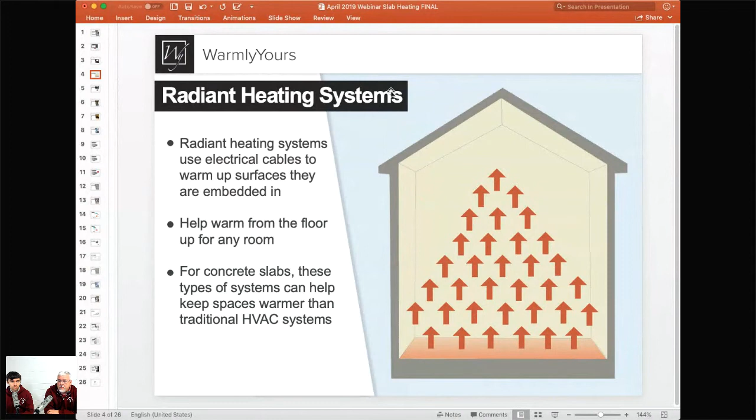And what's great is, if you have a slab, it's naturally going to feel cold. So if you had heat coming from overhead ducts, let's say you were in a basement, then all that heat would be coming from above. It gets about 2/3 of the way down in the room, and then it goes right back up to the ceiling. So your feet really never get warm in a forced air situation, whereas your feet are the first thing to get warmed up with this system. So this is a lot better, especially in basements, when it comes to HVAC systems.

So we're going to talk primarily about heating the slab, but let's say that the person already has a slab in place. What we're talking about in this particular slide is that you have a slab already and you want to heat the floor above it. Later, most of this presentation will be about pouring a brand new slab and getting heat built into that slab. So let's talk about warming a room over an existing slab.

Yeah, so in case the slab is already finished and you want to add floor heating, the biggest key element here is to add that thermal break, to add that insulation over your existing concrete slab, because you want to make sure your floor heating is nice and warm, and you don't want to try to heat that slab at this point because it's already finished and complete. So adding the insulating underlayment, like it's shown in the picture, one of our products like a synthetic cork, creates that nice thermal break and makes your floor heating installed on top work nice and efficiently, getting to the high temperatures and so on.

Yeah, so we're actually heating just a very thin section, less than 1 inch to 1.5 inches of material, which makes it heat faster. It'll probably get a little bit warmer, and it'll definitely allow you to change much quicker, as opposed to a concrete slab, which is going to have a much longer heating duration. Right. So you're kind of doing two different things. This is for a system that's going on top of a slab that already exists in the house. So we've covered the top of the slab. That's what we do most of the time here at WarmlyYours, because we talk to people who are remodeling, and there's a lot of remodeling work that's done on a slab that's already there.

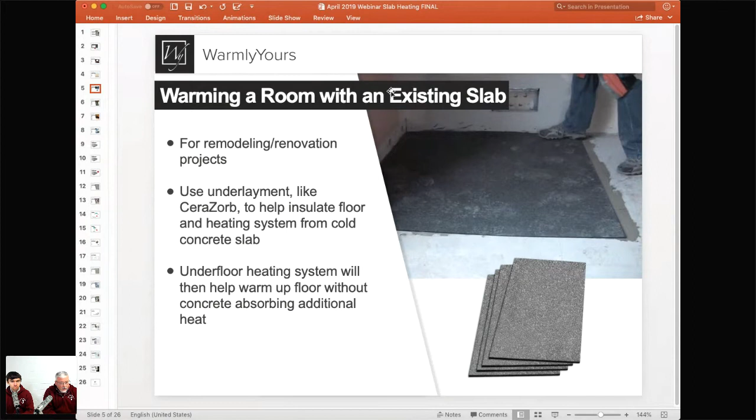So there is a difference. If that's the case, you use insulation. If you want to actually heat the slab, then there would be no insulation, because you don't want to block the heat from your feet. So this is actually the concrete slab getting charged with heat. And that's exactly what's going on here. So Gary, thank you for asking that question. So once again, expansion joints are very, very important. Let us know where they are, so we'll design the product around that.

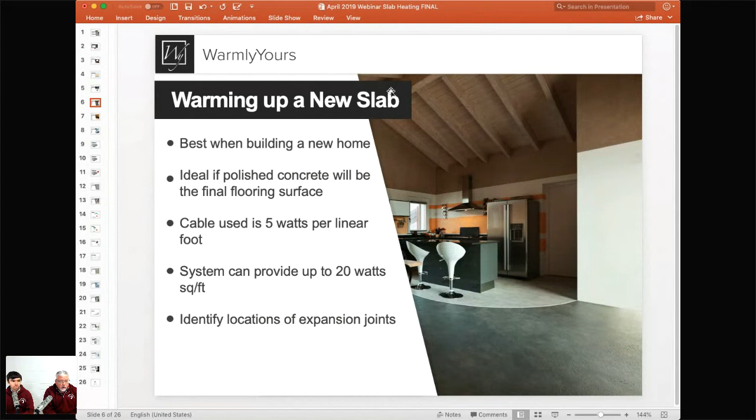So warming up a new slab with flooring. So this is actually when you're going to install carpet or tile or something on top of that. How is that different? Yeah, I like that slide. There are a lot of bullet points, a lot of information to talk about here. So yeah, there's really those two sort of subcategories here, where you just want to heat the slab, or you want to heat the slab and have the flooring on top.

If you do have a flooring on top, you really want to check with your local electrical code, or see how they adapt the national electrical code, to understand what the requirements are in terms of wattage per square foot. Typically, it's 15 watts per square foot, but that was recently changed. So once again, check with your local code, see what requirements you need to follow. We will design our system, our plan, according to those requirements. And at this point, we can see if this heating cable needs to be used here, maybe spaced 5 inches apart, or it's the slab heating mat that can be used at 20 watts per square foot.

Yeah, what the NEC is doing, the National Electric Code, different states are in different years of the National Electric Code. The 2017 National Electric Code doesn't have a limit on the number of watts that you can have in your floor. So in some states you can do 15 watts with the floor covering, or in some states that have 2017 coverage, you can put however many watts you want in there. So there is no limit there. That requirement is pretty much gone. You don't really need to worry about that anymore.

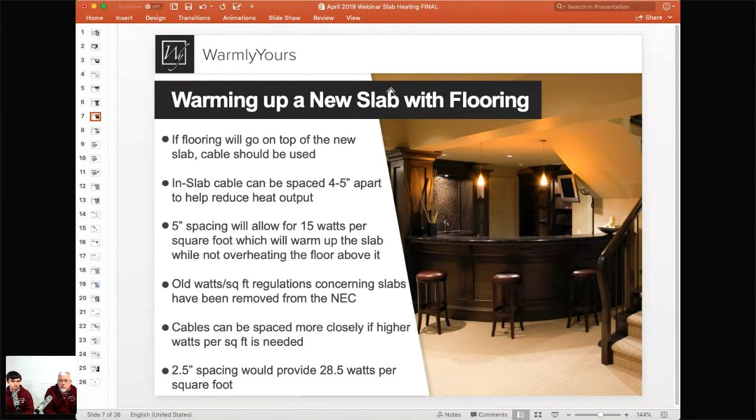So here we have slab heating systems. So let's take a look at these two types. What's going on here? So we have cables and mats shown here. And generally speaking, I always like to explain that this is really the same product. It's the same type of heating element that produces the same amount of heat, but with one or the other product, you can accomplish different applications. And with a cable, for example, you are so much more flexible. You can cover different areas, different shaped areas if it's needed. You can come up with those different designs.

So depending on the project, depending on that floor plan that we'll receive, we will design to the best of our ability to make the installation as easy as possible. And again, depending on those requirements, we'll pick one or the other product that will be used.

Yeah, so it's that blue cable that's attached to the mesh. The main thing about the mesh product is it's much faster to install than cables. So that's just something to keep in mind too. If you can do 20 watts per square foot, then use mats. They're so much faster to put down than the loose cables are.

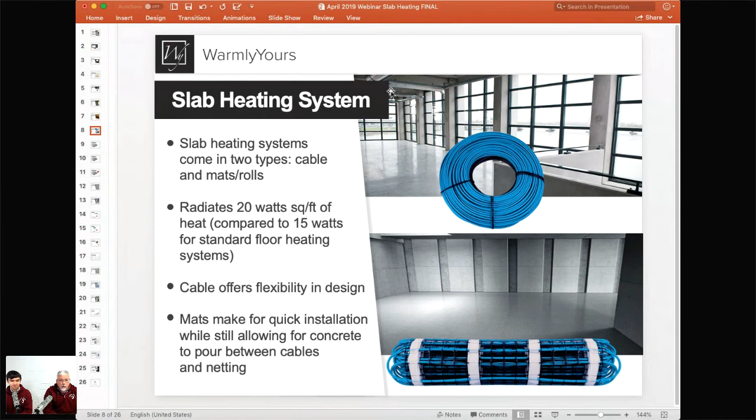So that's one thing: you don't want to be having a concrete truck there ready to pour concrete, and you're still tying these individual cables down to the rebar. That's really, really a bad scene, and those guys get really upset, and they charge you lots and lots of money for that. So we had a question from George about what is the minimum recommended concrete thickness and concrete cover.

So most building codes are going to say you have to have at least a 4-inch slab. Some say 6 inches, or whatever you want to do, but concrete's really expensive. So you don't want to pour 20 inches of concrete unless you're making an airport runway. We realize that slabs are usually 4 to 6 inches deep. What you want to do is get the cable propped up into the middle of this pour. So notice there's 2 to 3 inches over on top of this cable. It's once again the same product.

But the National Electric Code says you have to have 1.5 inches of some non-combustible product in here. It would be concrete. It has to be at least 1.5 inches over the top. So that's the most important thing. I think that's what you might have been getting at there, George. Is there a minimum above? And yes, the National Electric Code says it has to be at least 1.5 inches over the cable before you get to the top of the flooring.

So talk about the layers here and the different ways of putting this product in. Yeah, the layers are, looking at the cross section. It's always good to have that cross section when you are in that planning stage, or planning with your concrete professionals. You want to always, like Scott said, have that heating product in the middle of that pour. The last thing you want to do is have that at the very bottom and covered with 6 inches of concrete. It's going to take too much time to heat, or there may not even be much heat transferred to the top surface.

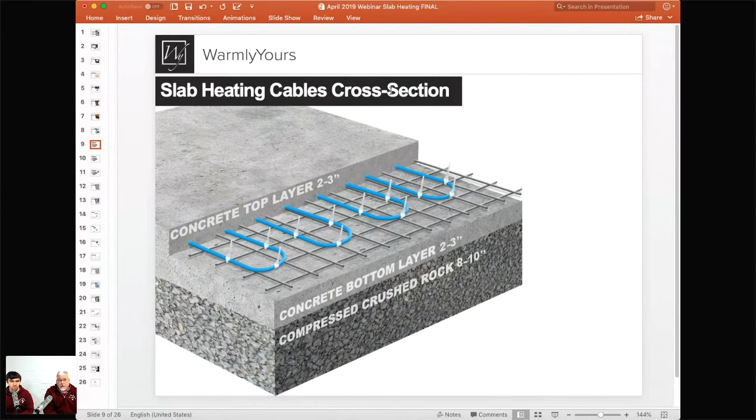So let's talk about the next slide. And what do we have here? What's the main difference between these two pictures? First of all, we have heating cables and heating mats. The positioning of that product is still at the same layer, but on that picture, you should see on the lower right-hand corner of the mat, there's a black part sticking out of the blue wire. That's your factory splice. In other words, it's the end cap factory splice, a termination of the cable. Yeah, we're gonna talk about that in the next slide.

But the difference I like to point out here, there's a lot of cable ties here holding the cable to the rebar, and there are not as many here. Because what you can actually do is use the mesh to hold it down too. So when you are doing this type of install with this mesh product, the one thing you need to tell your concrete person is they need to use sub 3/4 inch aggregate. And that means that the maximum size of the aggregate inside the concrete is 3/4 inch, because those little squares are 1.25 inch squares.

That's why they're called squares. So the thing is, if you have 1.25 inch, all that aggregate will pass through the mesh and allow the concrete to fill up naturally up to its appropriate height. So you don't have to worry about the mesh clogging or whatever. But you have to tell the installer we're going to be doing that, and they need to make sure sub 3/4 inch aggregate is to be used there.

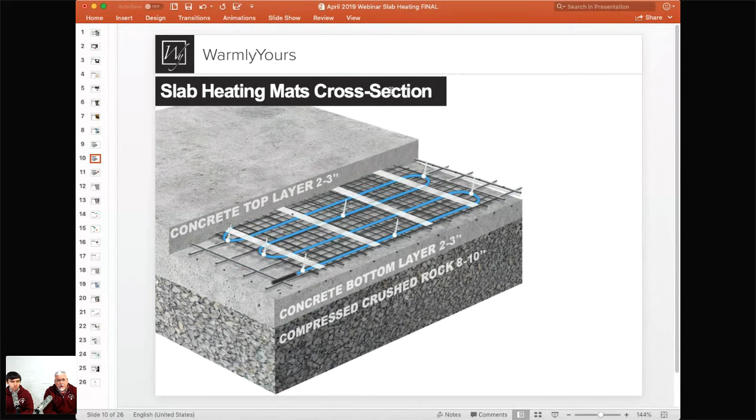So let's talk about those splices. Yeah. So the splice that is circled with a red circle here, that's that end cap. Since this is the part of the wire that you really want to give that extra layer of caution, be gentle with that part. Put the flags when the concrete installers are working with that. Set up the flags at that spot at the end factory splice.

There's the similar type connection, what we would call a start factory splice connection. Put another flag there, just so when installers are working with that, they are really careful around those areas, and of course around the whole rest of the mat and the cable. Yeah, those installers are going to be out walking over the cable. The last thing you want them to do is to walk on these splices, because that's where the actual two wires are mechanically spliced together. So you need to make sure that you don't walk on them.

We have not talked about insulation under the slab yet, because that is not a requirement everywhere, but I'm glad you brought it up. Do we have a slide about insulation? We might not. But anyway, some localities require it, and usually it's a 2-inch board of EPS or something like that. So always check with your building codes to find out if you need that and if you need perimeter insulation around the slab, because some will say you just need a 2-inch board and that's it. Some will say you need a 2-inch board plus perimeter to eliminate edge loss.

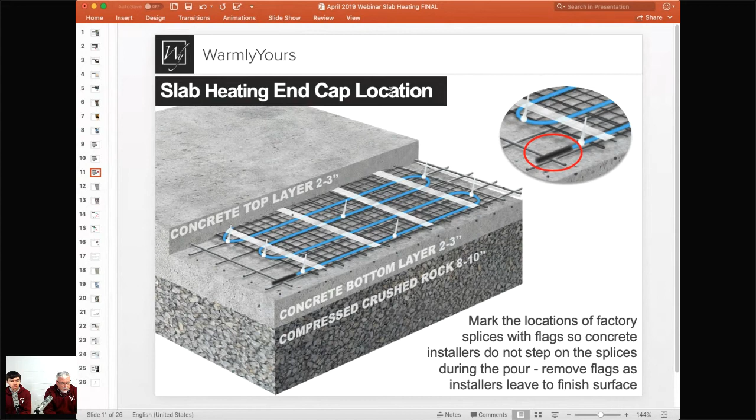And this is a great question, I'm so glad, Dave, that you asked it: you need to do whatever your local code says you need to do. So that's why it was left off of this slide, because that's purely a local install question that probably your concrete installer will be able to answer for you, right? So thank you, Dave. That's a great question.

So let's talk about the base layers. What's going on underneath here? So here we will slowly start to walk everybody through these layers that we showed all together in the cross section. For the base layer, we really just want to start with a crushed rock aggregate base that is 8 to 12 inches thick, and it's tamped down, so it's prepared for that next pour of concrete.

And this is actually the slide where we talk a little bit, just like Scott said, that 2-inch polystyrene insulation may be required by the local code, or some other types of insulation may need to be used here. Yeah, so check with your concrete installer. They can tell you what your local code requires when it comes to that insulation.

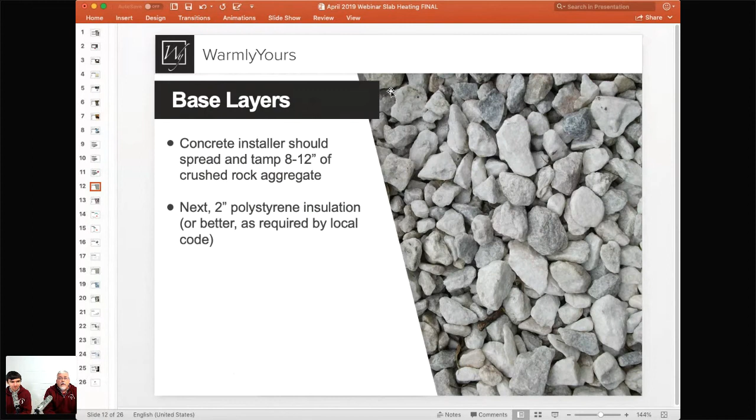And I just see Dave responded that he's in Alaska, so I have a feeling it's a good idea to have some insulation there. Well, it's probably warmer in Alaska than it is here in Chicago. So thanks, Dave. Oops, I went the wrong direction. Sorry about that.

And what you want to do is you want to find the location of where the predetermined expansion joints are going to be, because you don't run cables over or through the expansion joints. So what we would do in a job like this is we would get this set up like this. We would then do our install plan following the plan that we got, and then we'd find out where that expansion joint is, or where they are.

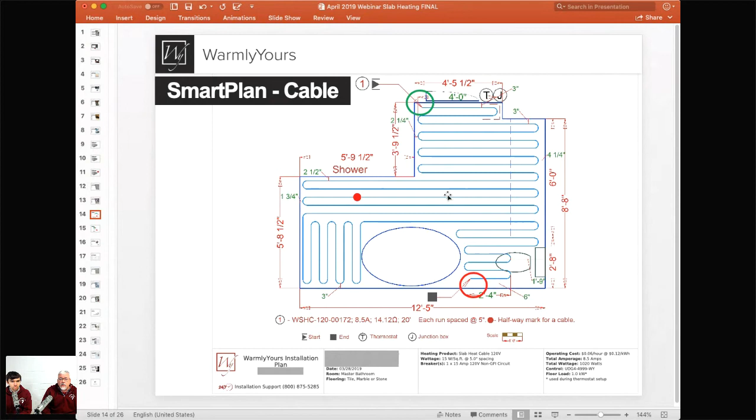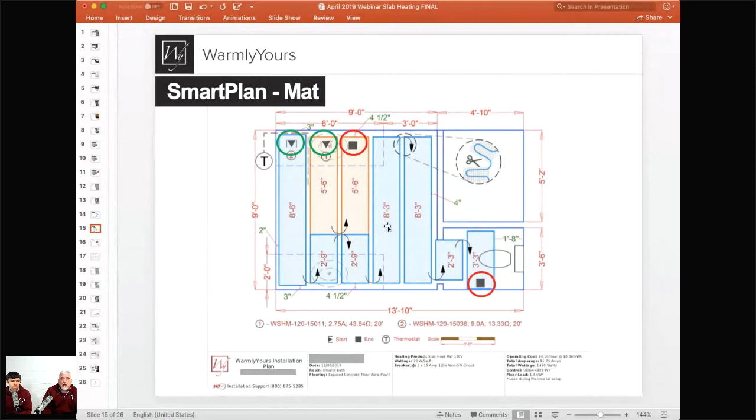Yep. So keep that in mind. That's why it's designed this way, to get these cold leads right over to the thermostat instead of having the other one start way over here and go, oops, I'm out of cable. I can't get to the thermostat. So that's kind of the difference there. And that's why they are drawn this way, to make your job easier.

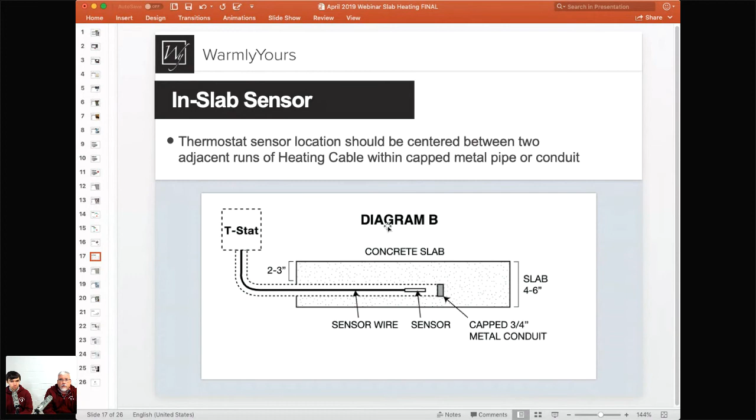So you'd be surprised how many hot water systems don't even measure your actual slab temperature. They just make their controls based on BTUs and the amount of time it runs and that sort of thing. So you never really know, in some cases, what your actual slab temperature is when you're using hot water. But with electric heat like this, you're always consistently controlling that temperature within 1 degree of what you want it to be.

So your heating cable or heating mat is at the right depth, and then you just pour in that final 4 to 6 inch pour of concrete. Your cable ended up being in the middle of it. All we really want to have here is just that the cable sits 2 to 3 inches beneath that finished surface.

Yep. And where your flags were, where the people were not supposed to be walking, at this point, the guy, before he starts to get this finishing machine out, he can go and pick those up or do whatever and get those out of the slab and then start to finish. Because at that point, you have a beautiful finished slab.

And let's talk about how do we control that temperature. We do it with thermostats, right? I almost wanted to say we control this beautifully finished slab with a beautiful thermostat. Yeah. But like we showed already, that sensor gets connected to the thermostat. So the thermostat knows what the temperature of the floor is. And then you just set it up and control it and test it the way you want. It's a very easy to use thermostat.

If it's just a normal sized room, you probably will end up with just one thermostat for the whole system. If it's some larger areas or combined zones, you may just need an additional module to it. But it's very easy to use. You set up the temperature you want, and the system just maintains that temperature by turning the system on and off. So just cycling. Yeah.

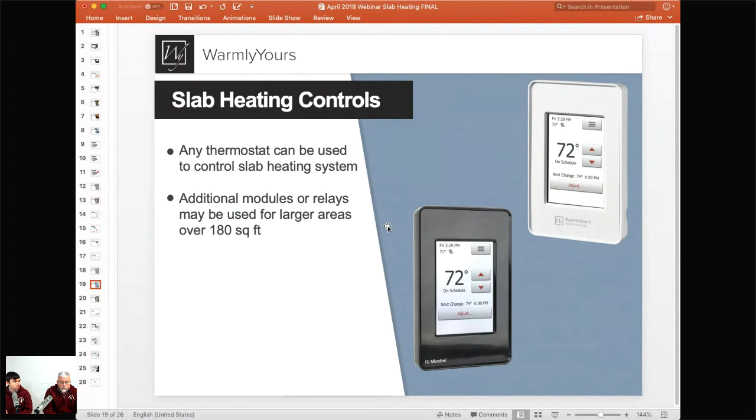We had a question from Laura about how much height will this solution add from the top of the slab to the bottom of the finished floor? Zero, because it's actually included inside the slab. So if you take a look at slide number 9 or slide number 10 where we showed the layers, it's in there. So it didn't really add any height. So if you wanted a 4 or 6 inch slab, that's what you're going to end up with, because you're going to put the cable right in the middle of that slab. So it doesn't add any height.

It's when you get into heating on top of a pre-existing slab, that's where you're going to add maybe an inch and a half, because you're going to put Cerazorb over the top. You're then going to put the wire and then the final flooring. So that's a great question, Laura.

And Chris asked if this could be used for commercial use. A lot of places, we get calls from warehouses, people that want to heat the part of the warehouse where the people stand, as opposed to out where the trucks are going back and forth, that sort of thing. And this is it. If your slab can take it, soak in the heat.

The thing to keep in mind is if your slab is inferior, if it gets too thin, if it starts to break up and crack, if a slab starts to crack and then separate, when it does that, it can shear the wire. So right. If your slab is not strong and it fails, there's a chance if it does a shear that it could cut through the cables. But you very, very rarely see that. It's usually not an issue. And when it is, it's when the guy said, "Oh yeah, I poured you a 4.5 inch slab," and it was really 2. So that's the kind of stuff you have to watch out for.

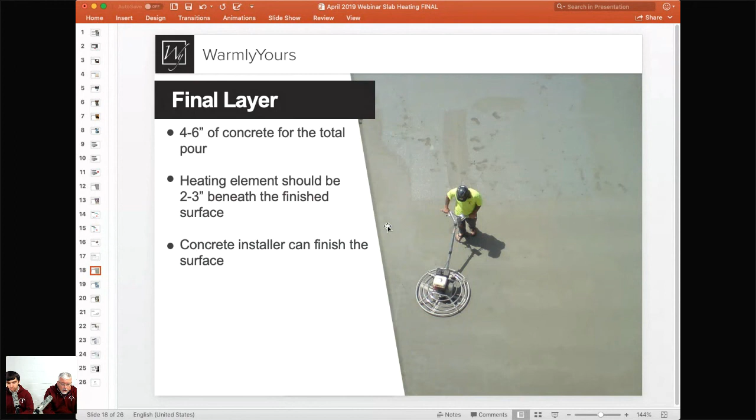I mean, you never know these days with the new technologies how nicely you can get that slab polished or stamped. There are just some amazing finishes that we saw. So that type of surface really can add a nice look to that interior design. So again, the concrete installer or designers later on can really just finish and polish that slab to the best stability, to the best design that needs to be matched here.

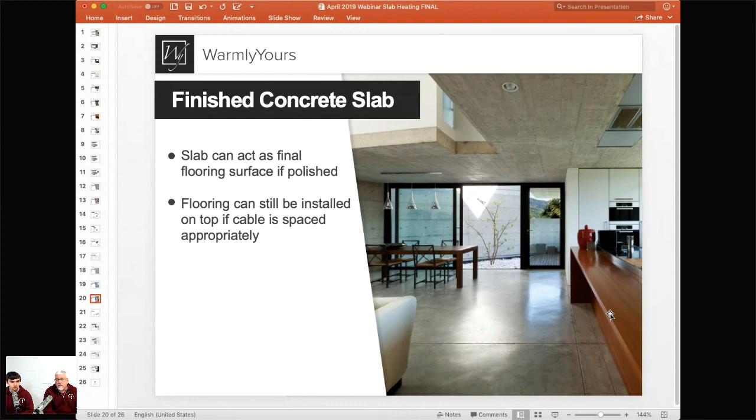So if you have any questions, go ahead and type away. We did have a question from Lon, and he asked, are there any restrictions or issues for installing this into lightweight concrete over an unfinished basement? Well, you have to remember, Lon, that if it's an unfinished basement, it may be unheated or an unconditioned space. Whenever you have an unconditioned space below a floor, you have to worry about not only the heat going up, but you have to worry about the heat being lost from underneath.

So that's the case where if you have an unheated area below, you may not want to heat the slab. You may want to put Cerazorb over the top of the slab and then put our TempZone product on top of that, because that'll isolate the cable from the cold slab, because that slab is not only going to be its normal chilliness, but now you've got 30 or 40 or 20 degree air below it, trying to make it colder. So what you want to do is isolate the heat from the cold.

So you either insulate underneath the slab and put the heat into the slab, or if your slab's already there, you put a layer of insulation over the top of the slab and then put the cables on top of that. So hopefully that answers your question, Lon.